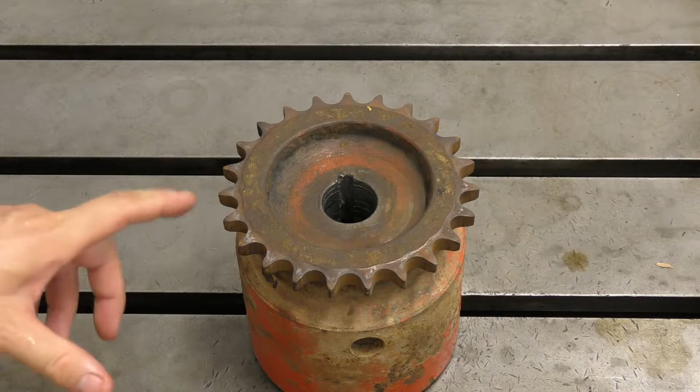Here's the next mission for the shed. This is a hub off a final drive on a Dingo, just like a small bobcat that you stand on the back of and ride around. There's heaps of different attachments for it.

This is the wheel end, so a shaft goes in here, and on this flange on the bottom is where the wheel bolts on. So the whole axle is actually the motor shaft, the hydraulic motor shaft. Pretty substantial looking shaft. This goes in here, keyed around like that.

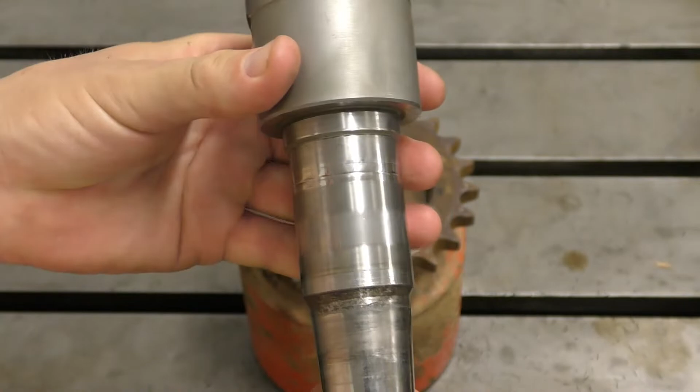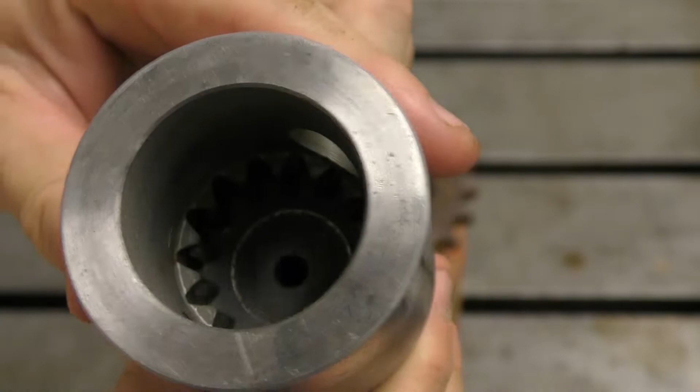There's big needle roller bearings in here, and spline up inside here. It's driven. So what's happened with this one, as you can see, the key's broken out. I've filed this, it seems a bit hard, and the way that internal spline looks, this nearly looks like a powder metallurgy part, potentially, that's been sintered and then ground.

These are all ground surfaces, another one here, another one here, here, here, here. Of course the taper, and then the thread's been machined.

I think maybe what's happened, I'm not 100% sure. So you know that in this here, the taper is a driving taper. If this was a nice matching fit taper, then there should be enough friction on that taper to never ever slip in here. So at some stage, either the nut's been too loose, or the key's been an interference fit and bottomed out and not actually let this thing seat properly maybe.

And it's allowed this to walk in there, and then the key's sheared. If I zoom in there, you'll be able to see the carnage inside that hole. You can see it's minced it pretty good.

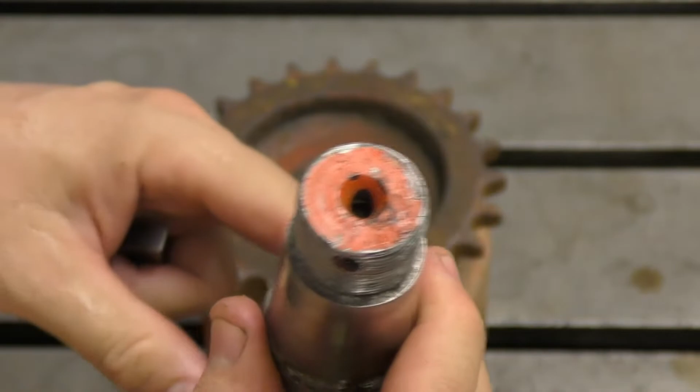So this is a 5/16 Woodruff key. I'll zoom back. Oopsie. 5/16 Woodruff key. You can see it fits the groove widthways really nicely. But the issue, I think, is that it was the wrong one. So see, it's never bottomed out. It doesn't sit in the woodruff.

So you can get different diameters of these, different arc. Potentially, you know, this was sitting, the previous key that was in there, I'd heard from the owner, had been ground down to fit the slot. Maybe that was still a little bit too high, I don't know, but either way, from forward, backward, forward, backward, forward, backward, which this thing drives the axle of like the little front end loader, like I was saying, it's eventually just broken the side out and smashed out of it pretty substantially.

So I have to get the right key so that it seats down properly, and then be very careful of the height to make sure it fits the keyway properly.

So the repair on this, what they've asked me to do is to build up this hole and then remachine it to this taper and then recut the keyway.

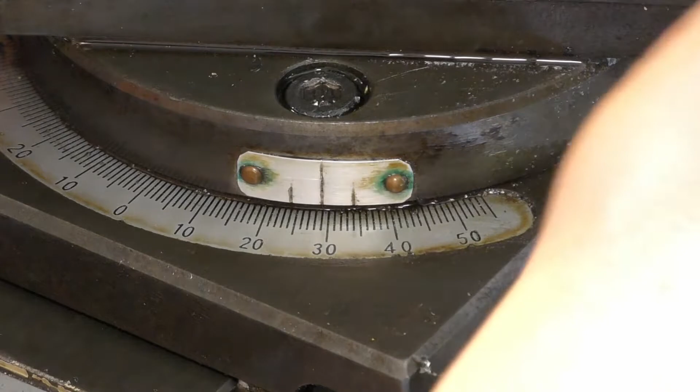So what I'll do is the 4-jaw's in the lathe at the moment, which I'll leave in there. What I'll do is I'll put a bit of steel in there, and I'll machine a point on that bit of steel, and that way that piece of steel is true to the axis of the lathe because it's been machined in the lathe.

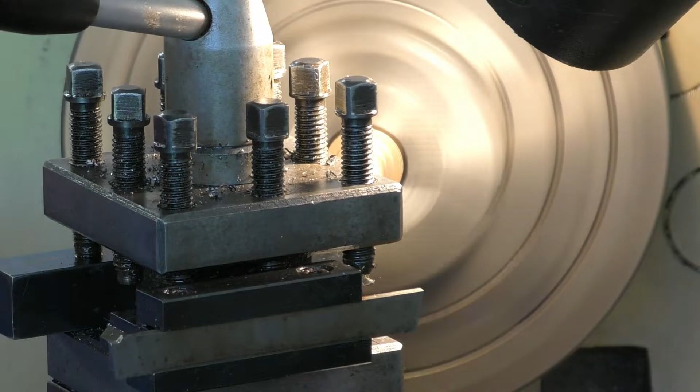That will then go in here into that point, and then in my tailstock, which I know is set on center, I'll put in a pipe center, and the pipe center, as you know, is just a big live center. It'll sit and pick up that radius there, and this should sit fairly true.

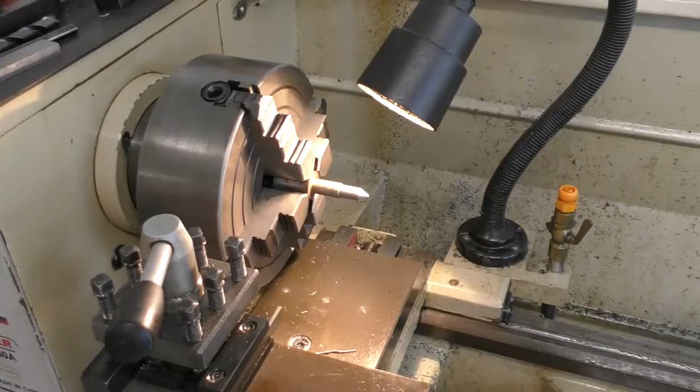Then confirm that, I'll dial this surface and just make sure it's parallel. And then what I'll do is I'll offset the compound slide on the lathe with the dial on the compound slide, and I will trace this taper.

Once I know that taper, I'll then put this hub in the four jaw and I'll machine out this bad material. Probably take the key away, or I don't know yet. I might just try and grind that out, don't know.

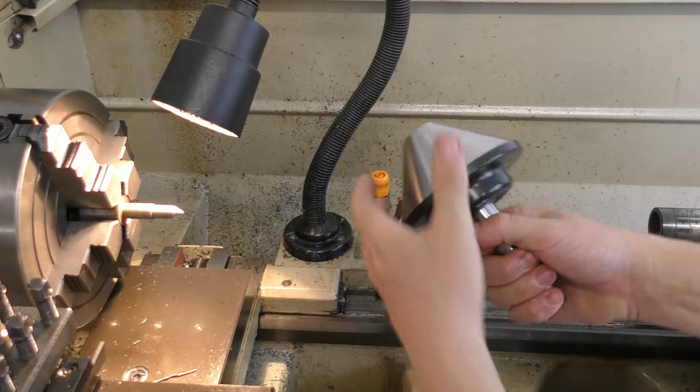I'll then fill this up with weld and then remachine the bore true to that taper. After that, we'll be cutting the keyway. Alright, let's get into it.

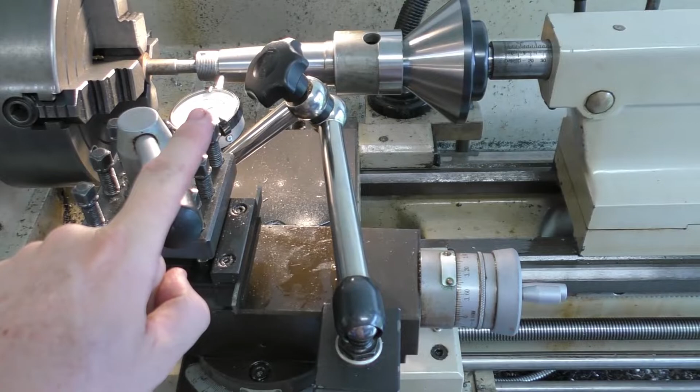So I need to turn it this way, try a little bit. And we'll clamp it again, and this time I'll also clamp the front one. Okay, we'll go back the other way. Looks like we got it bang on there. It's not moving off the 0. It's still bang on the 0.

So that's pretty good. And now what you should do is go to the other side and repeat that, just in case. So we've got this hole at the top now. Alright, let's go this way. Still on the 0.

Yeah, that's gonna be pretty close for me. Okay, so that's how you do the setup. So that's how we find out what the taper is.

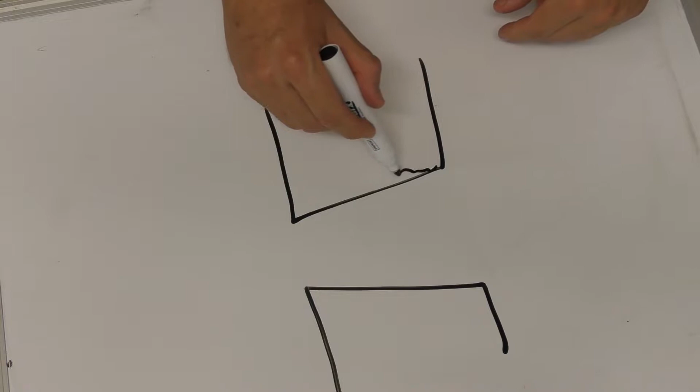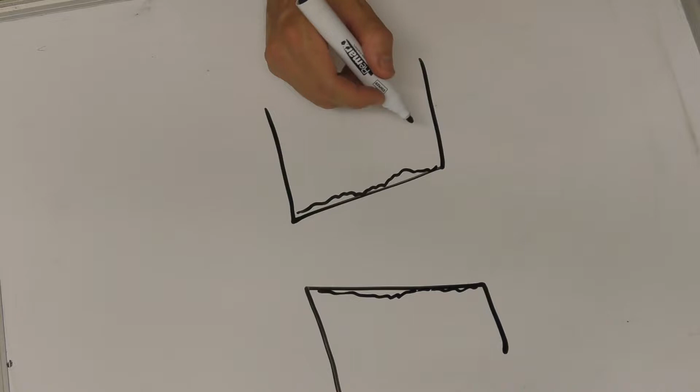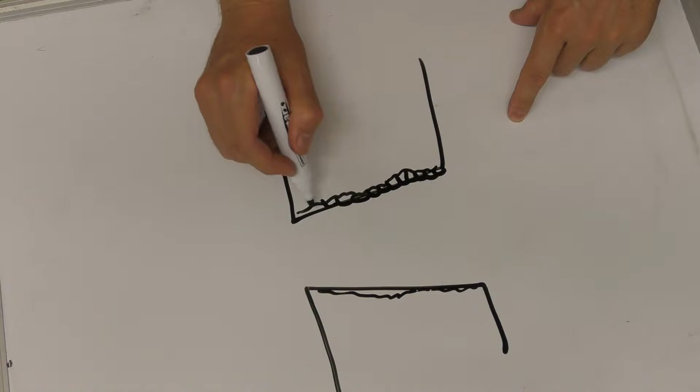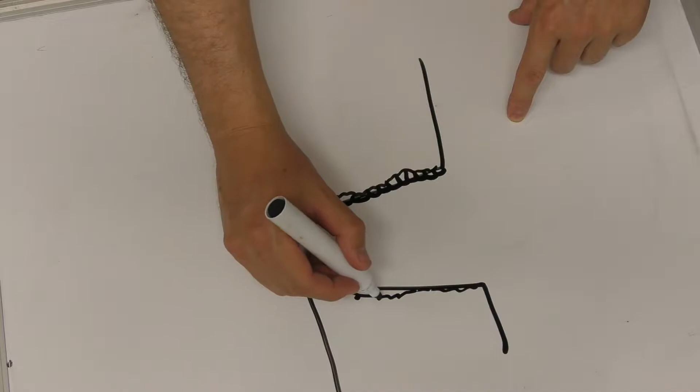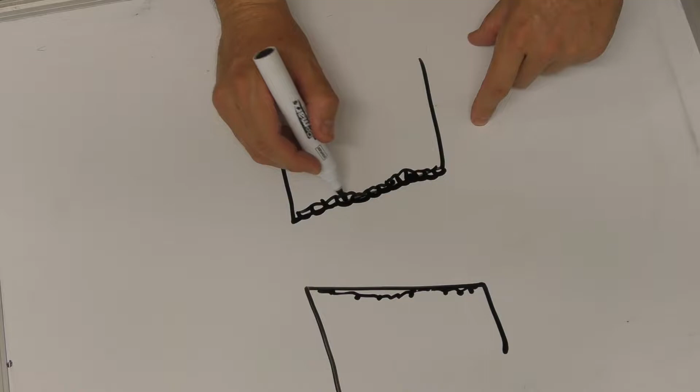So if we were to machine that bore out, that whole hub would translate up the shaft too much. So what we've got to do is skim material out of that bore, weld it up on fresh material, and then bore it back out to size, make sure the major diameter of that taper finishes up the same as the other one. And that's it. Alright, so all of this here was just for setup.

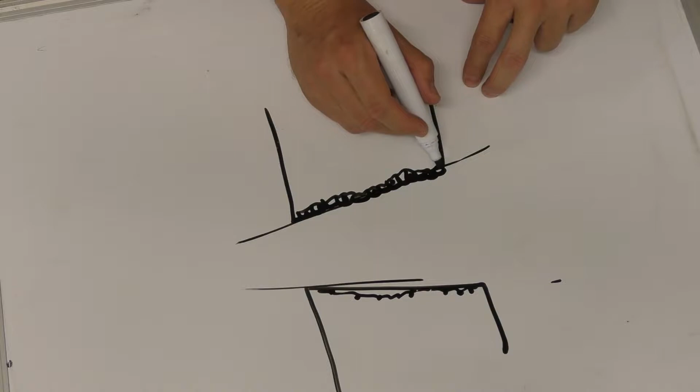I'm just going to explain why it's done like this, that you machine a hole out and then weld it back. Why not just weld it up and then machine it? Well, the reason is if you were to look at the hole that we've got here, we've got a tapered hole like this, and it's damaged.

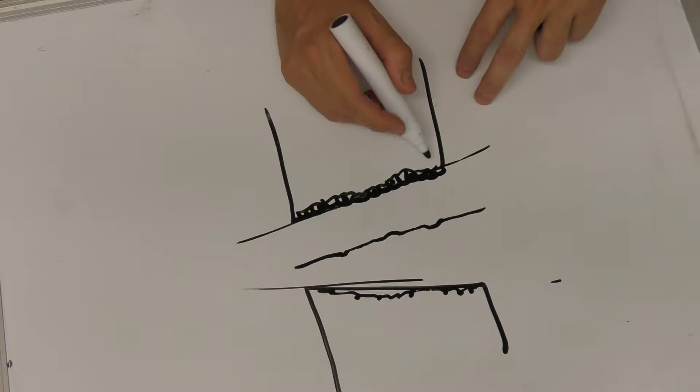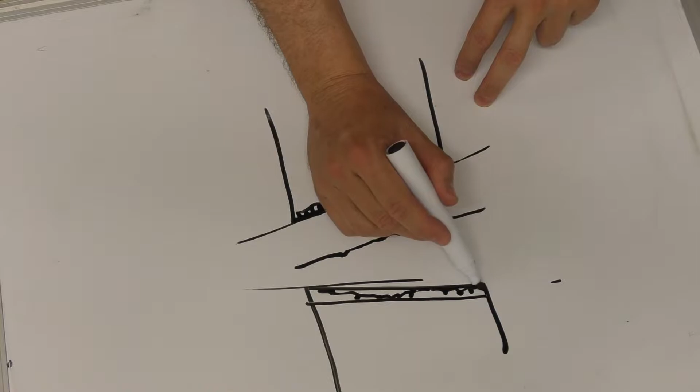You know, the hole's surface is like this all the way through. So we no longer have this nice machined taper anymore, this is the actual surface we got. So if you were to come along and place a weld over this, you'd follow that shape. And what you'd finish up with is any contaminants, whenever that shaft broke or the key broke or whatever happened, you quite often find contaminants get embedded into the surface of that damaged surface.

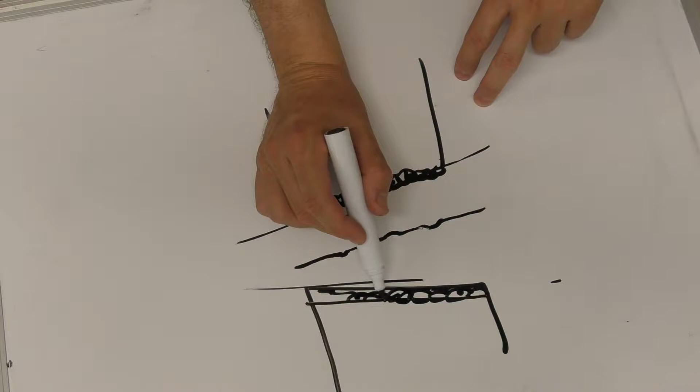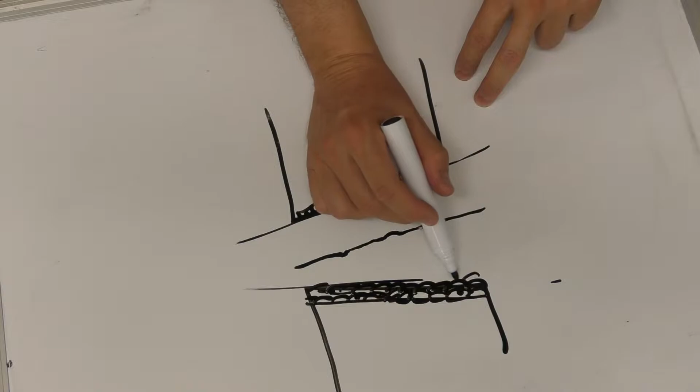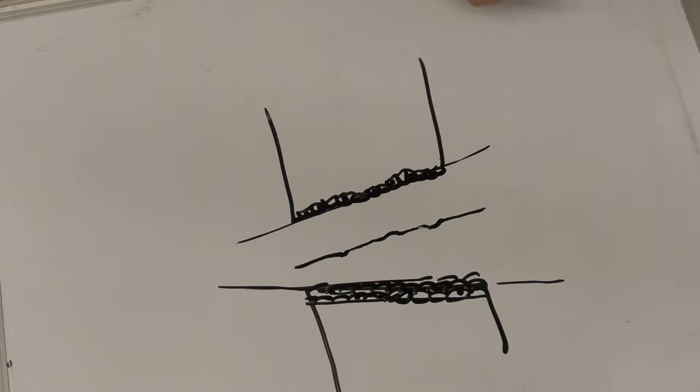You get all sorts of fretted material and whatever, who knows what's ever in there. When you weld over that, you finish up with, depending on the carbon content of the steel and the weld material you're using, hard spots all the way through, mixed into that weld pool as it goes. And when you come across later and try to machine this out with your machine to re-establish that surface, you quite often run into these hard spots.

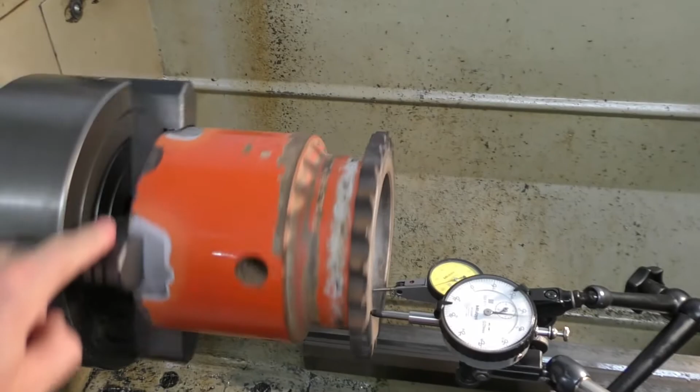And what will happen is, if you were to look at that surface a bit closer, let's just draw it in here: as you're machining along the nice homogeneous, uniform material, then you hit a hard spot, your tool will deflect and you'll finish up with a little bump. Wherever you hit a hard spot, or potentially even a soft spot, tool deflection, you'll get all these bumps and craters and you won't actually get a nice smooth straight path.

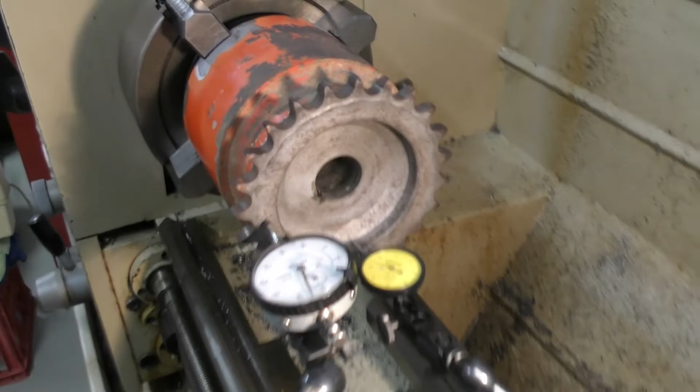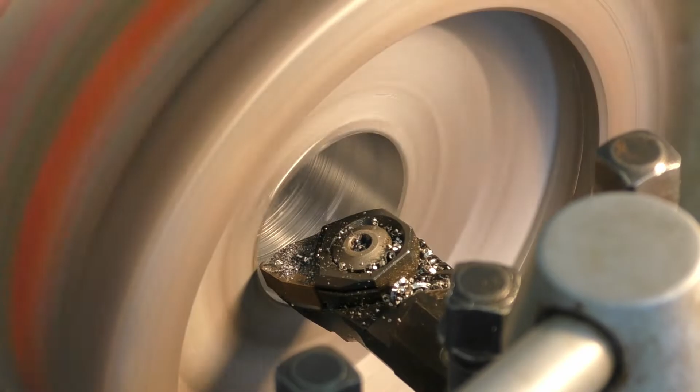So that's why, let's draw it on this side, you get all of this surface that's damaged and you just machine all that out, get rid of it, make the hole bigger. So then you've got a nice clean surface of parent metal and you start laying your weld beads on top of that. So any mixing that happens in the penetration zone of the weld is only between two different metals rather than three or four, whatever contaminants were there being removed, and you'll build all that up and keep laying beads on top and make it proud.

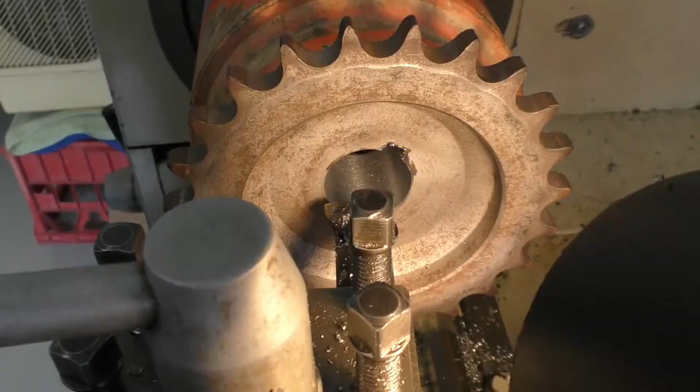The key is to put enough weld in there to get over the top of where you need to be, so that when you machine that surface, you're only machining the weld metal. And that pretty much sums up why you do it like that.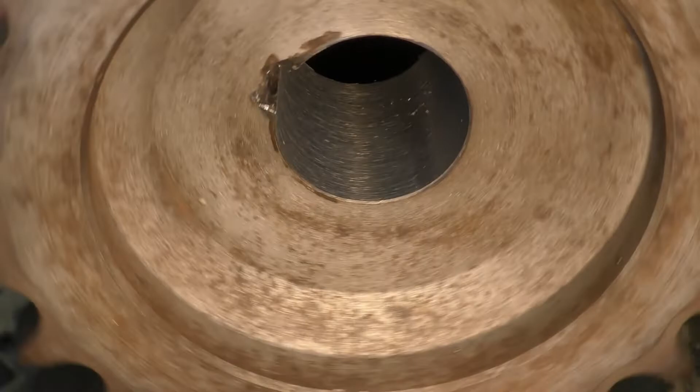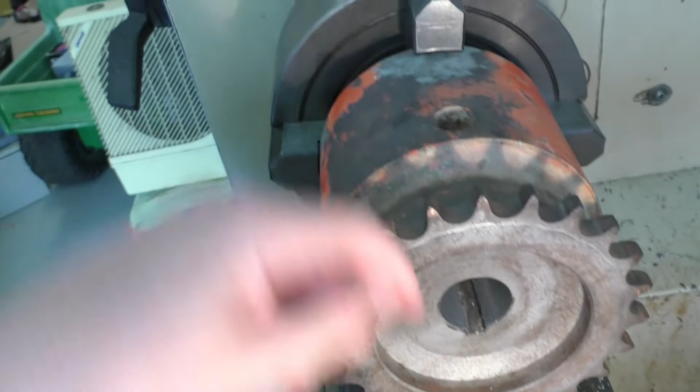Now it's raining outside again, but all I've done here now is got the hub. I've sandblasted where the jaws go to get a good grip, sandblasted the face as well just to clean it up a little bit. We've got two dials running here: just a normal dial running on the face, and then a finger dial running inside that register there, and just dialed it in roughly so I can skim out the guts of that hole.

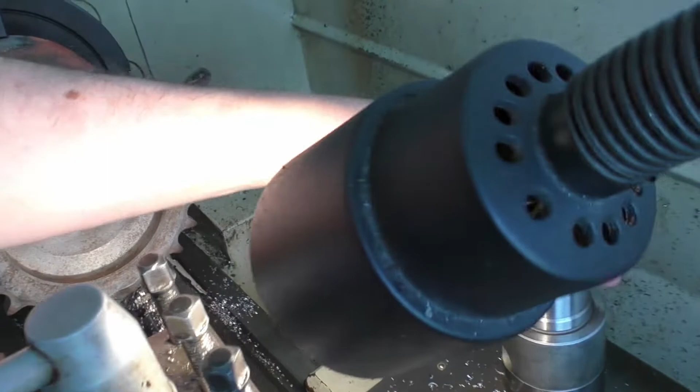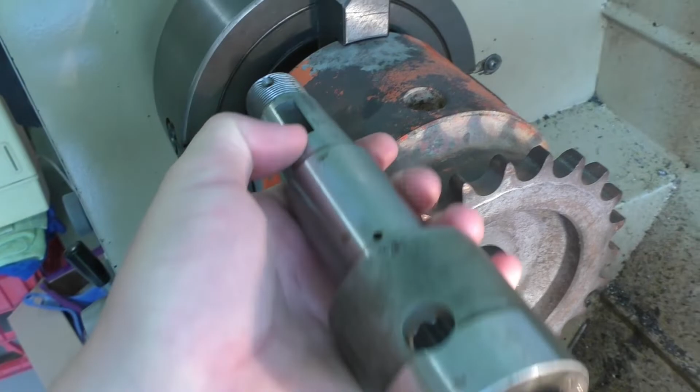I don't know if it's had a shot yet of the depth. As you can see there, it's pretty ordinary. So now I'll put a tool in the tool post. The compound slide's still set, so we'll skim all that crappy material out.

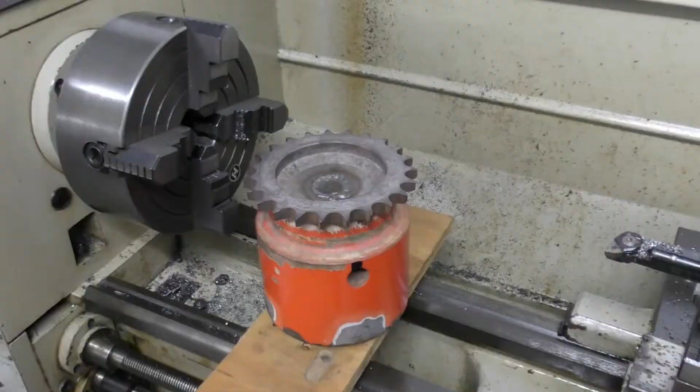You can see now we've cut the hole. Move this over a bit to take a look. Cut all the muck out of the way and clean the hole up.

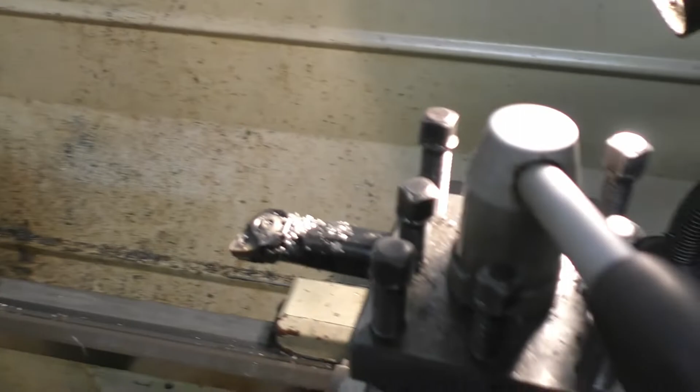The plan with the keyway is we'll fill this with weld and I'll cut the new keyway on the other side in this fresh material here. The reason this is located here is that it's in line with these holes. That's so that once the shaft's in the hole, the key orientates the shaft, and this hole here is a through hole that comes right through the other side, to allow you to get the split pin in through the end of the shaft.

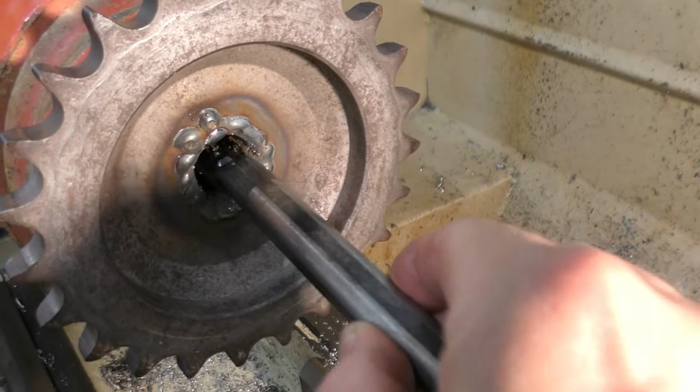So you can see the shaft, the key lines up with the split pin hole. It's got a castellated nut, so this goes inside, and once it's mounted, you'll see it lines up with that hole at the top.

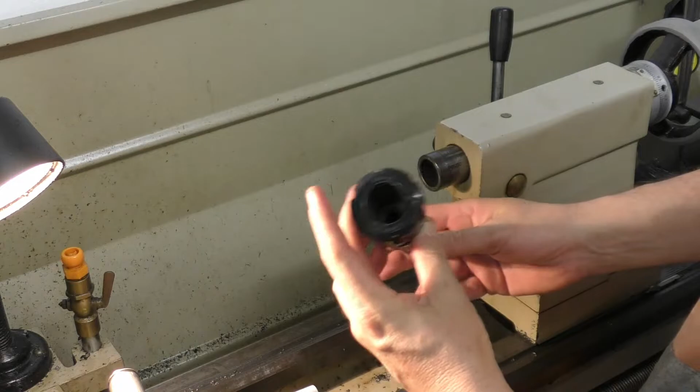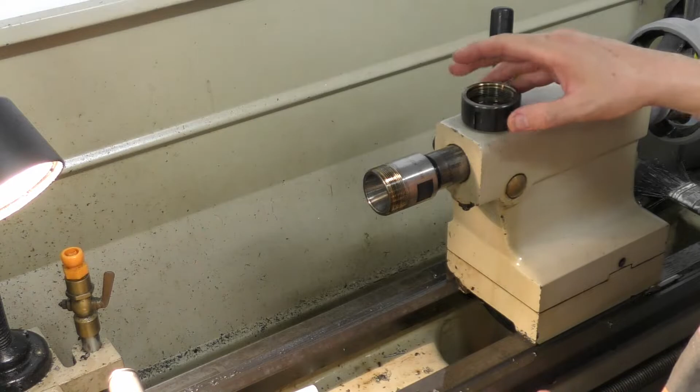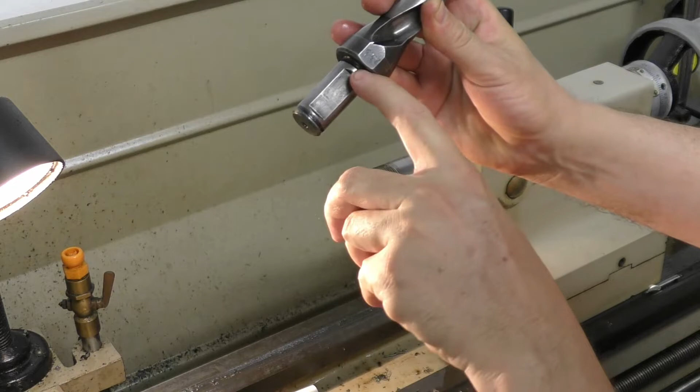So this key obviously needs to be in the right place. We won't put it here again because this is all damaged and yucky, and I'll fill that with weld. I'll probably get a little burr on and clear all that up, or maybe file the guts out of it and make sure it's nice and clean. We'll lay a couple of beads in there, then build this up over the top. Like I said, I'll mark this and make sure the new key and new keyway are in fresh material, not in this junk here.

We're back from the welding bench. I took the MIG, filled in the keyway, and then built up the bore all the way through to the back.

Now you can see I've got the job dialed in the four-jaw, back in the lathe. I dialed it on this face and this register, just like before. You can see I've closed that hole up quite a bit, which now won't allow the larger boring bar to fit in the hole. So I've got a selection of smaller bars, but even if I was to take a pass in here, it still won't make it all the way to the back. So that's not a good candidate.

I've got a smaller bar here, but same thing - if I took a pass in, it still obstructs at the back and doesn't make it right through. So the best thing to do is to drill it.

So here I have a 23.5mm U-drill, bought off eBay a long time ago, and I bought inserts for it to match it up. It had no inserts when I bought it, but I figured out the manufacturer's name that's on here somewhere - there, it's an ISCAR.

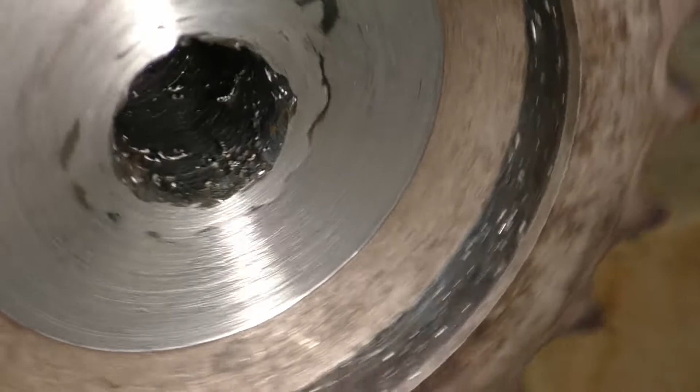There's an ER32 collet holder to Morse taper 3. It's in there - it's the right collet for the U-drill. Always make sure this flat here, that the collet always sits up on those two flats. I'll put the collet like that, and always make sure that collet's fully home.

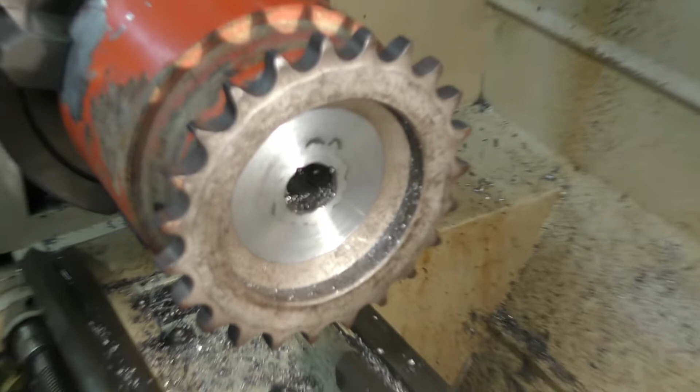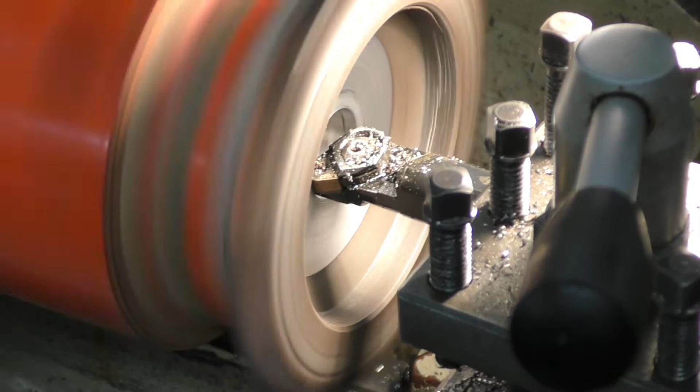Here's a really good example of what I was talking about before. I've just taken the face of that weld down, and you can see the hard spots in there. So that is weld metal, and that's the parent metal of the job. Something's happened where it's made that hard as hell, and the finish on it has come up different. Look at that - you can see the heat affected zones of the welds, and whatever's happened in that area has made it hard.

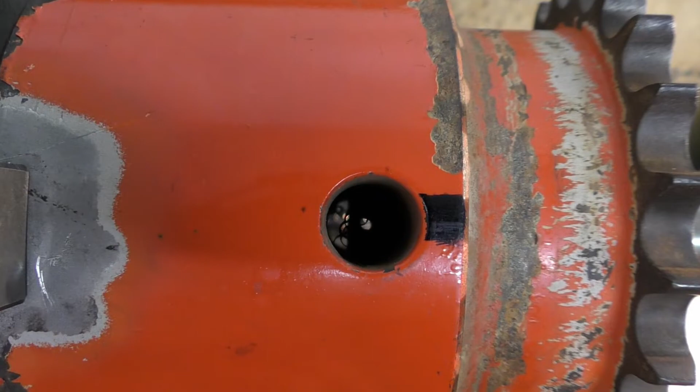So this bore I'll machine probably up to where my fingernail is, and it'll all be in this material here - none of it should be in that mixed section. That's probably just a good example of what I was talking about before. If you were trying to machine a really accurate surface in there, it's going to have ups and downs and ridges from this tool. You'll probably find, if I was to measure this with something really accurate which I don't have, that those spots there are actually higher because they're harder.

You just push the tool away from it. So you really don't want that in a bore, especially on a taper, because you want that shaft in full contact along that taper. So anyway, there you go.

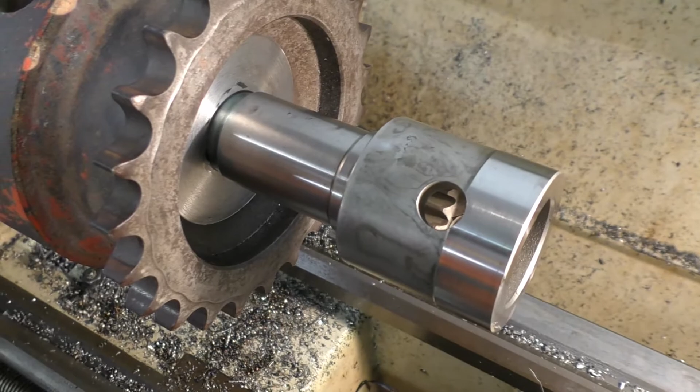So next thing, the U-drill's been in here and made that hole. I've just faced this, roughed that out, got rid of all the high welds, brought it back and blended into this corner here. Now I'll start machining the taper.

That's about it for the machining in there. Just test fit it again and blued it, and you can see down through the hole, you can see the end of the hole in the shaft that the split pin goes through. You'll also see here I put a Nikko pen mark to show where the old key was. So when the new key goes in, we'll put it around on the other side, line it up with the other hole. So basically that hole there, so we'll put the new key in this side lined up with that hole again, so you can get the split pin in the hole of the shaft.

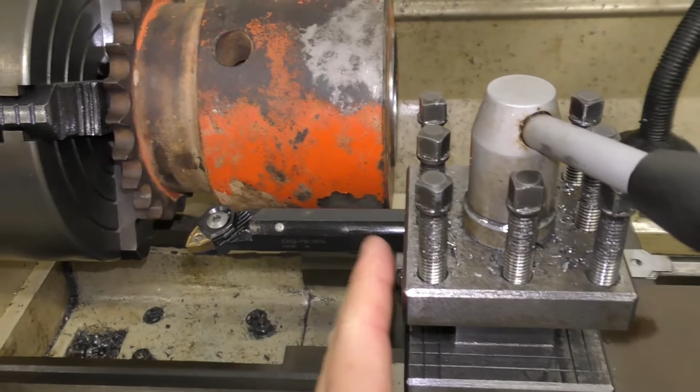When I originally looked at this, I've gone and faced this just to clean it up, just to blend that weld in, but before that, or you've probably seen in the earlier shots in the video, you actually see right out probably to near my fingernail there was like a discoloration, like there was a big washer or something maybe there. There's a taper here on the shaft, which I wouldn't imagine a washer would sit up against. I would have thought that would be like a square shoulder or something.

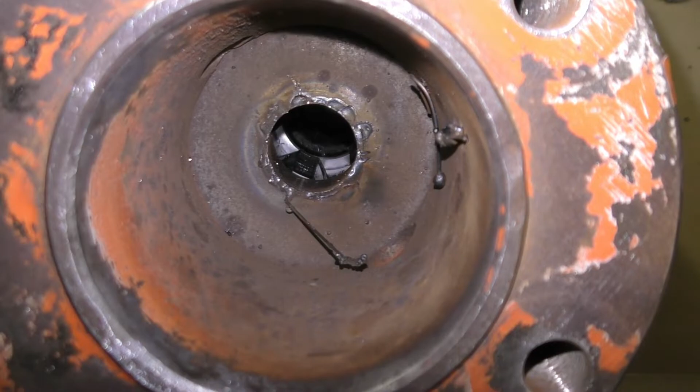There you go, out of the machine. A bit of a wipe with a dirty rag. See the bore's come up a nice finish. You see the heat affected zone of that weld. That was the keyway side. The new key will get bored in this side into the fresh material in line with this hole. The previous key was there, as you can see.

It's amazing how differently the tool skips across it, but the bore come up nice. A couple of little porosity holes, like you can see one there, where either the shielding gas from the MIG didn't get in there properly or whatever happened, but you can see the bore all smicko. Finish come up nice and smooth, and the shaft fits.

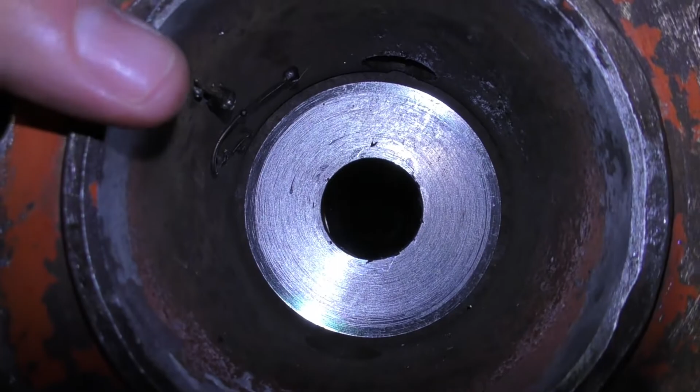I'll flip this around now in the four-jaw. We're grabbing it on the inside of that register that we dialed up off before. So I flip the jaws around and we're pulling outwards. Stuck the boring bar out just enough to reach the bottom of the hole before it hits the tool post. And what we're going to do is go inside now. I've dialed this face and also the run out. I gave it a little touch in there as well with a little finger dial just to make sure that everything was nice and straight.

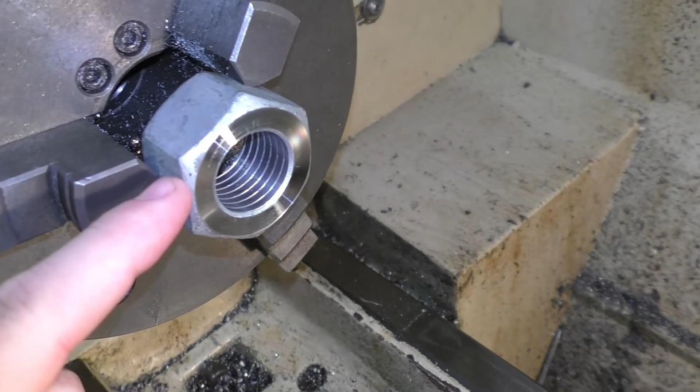What we're going to do now that this is set up in the lathe and it's running true, we go in there and face. You can see where the weld is proud, because I welded it all from the other side, stuck the wire right out. You can see a couple of dags here where the wire's touched the side. But basically, I was flat out getting the torch right in from the other side, so I had to have a lot of wire sticking out.

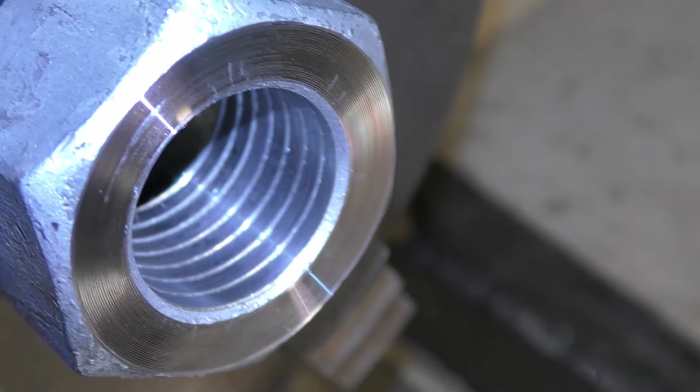So I tend to let the wire run out so that the area is flooded with shielding gas, and then bring the wire down onto the job so that you've got a good shield, and then whatever wire pokes through, well, it doesn't really matter, you knock that off later.

So what we're going to do now is just pass my finger there. I can't reach right inside, but that surface there, we've got to get rid of that proud surface because the shaft comes through this hole, and then there's a big washer that goes against that face and pulls the shaft into that taper. Alright, so we'll do that. I'll probably do that off camera because it's going to be a mongrel trying to set this up to get a camera shot in there while we're doing it. So I'll show you once it's finished.

And here's what it looks like. So I've still got to knock them dags off there from the welder. You can see a couple of heat affected areas there from the weld that are hard. I've got to clean it up yet. I've run a deburring tool in there already, it's like your Noga deburring tool. Run that around inside the hole, clean the edge up, tried to chamfer it from the inside as best as I could with the tool.

But that's pretty much it for that job. So I'll knock these dags out just in here, that one and the other one. And that's it. Ready for the keyway to go in.

This is what we're up to with making the new castellated nut. You can see that nut that I had before. I faced it and bored the guts of it out to the minor diameter of the new thread, which is this one, inch by 20 threads per inch. You can see even though it's to size now, there's still some of the old existing thread in there. It's trying to focus on the wrong spot.

Just as a little bit more info, this thread here is actually a standard thread. So you can get a thread called UNC, which is Unified Coarse. There's UNF, which is the fine version, and then there's a UNEF, which is Unified Extra Fine, and that's what this is. So this is a standard thread out of a UNEF thread table. So if you look that up, you'll see 1 inch by 20 threads per inch, and that's what this is. Okay.

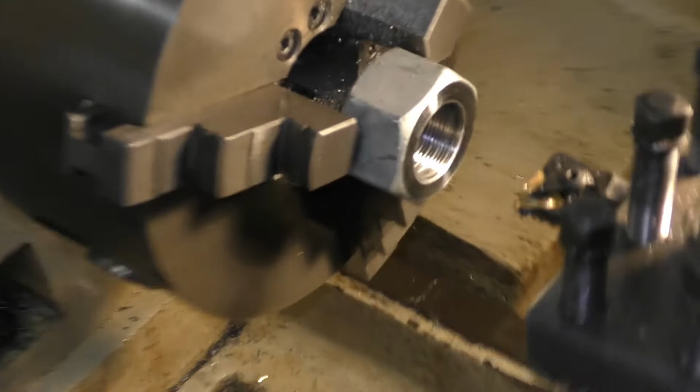So I've taken this thread to size now. All I'm doing is just a couple of spring passes just to give you the idea. Because it's a through hole, you can go pretty fast. So the spindle's spinning at 1,255 revs a minute. This is the final size diameter. So all I do is take the cut. This lathe's got a foot brake so I can stop the spindle, and then I back off a clearance amount, back, reset the cut, take it, and this is what it looks like.

Back a safe distance, and stop again, and back to the spring pass, and stop, and back to the spring pass depth, final size, stop, screw it back in a safe distance, backwards, and over and over and over. So that's how I've cut. Gives you a bit of an idea, that's how I've cut the thread the whole way down.

So sometimes what you would do is set the tool up at an angle, just like what you would on an external thread. You'd be following the V of the thread down like that, but in this case I'm just plunging straight in and taking lots and lots of light cuts, but in the bore of that hole, obviously. And that's about it. I'll just unclip the camera and you can have a look inside the thread. Whoopsie. All nice and smicky dicky all the way through.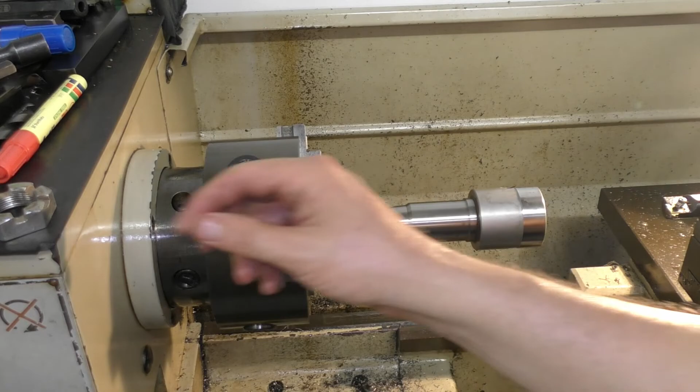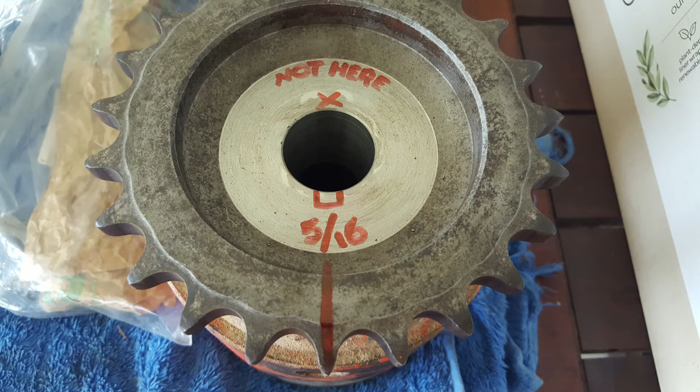And while we're going, we'll just screw this out of the way. And try the bolt. Well, the start's not the best. It's a nice fit, that. Yeah, nice. That is nice and firm, that. It's good. Nice fit.

And that's it. Now what I've got to do is, I may try and just mark this in the lathe now while it's true to this face. Mark it and give me some guides so I can cut this nut in half. I'd like to be able to get 2 nuts out of it. But I haven't actually measured the nut properly yet. It's going to go that way obviously because I've faced this true to the axis.

It doesn't really look like I'm going to get 2 out of it. I might. They might be a bit scungy though. It'd be nice to get 2. It'd have to be an extremely thin cut, like a 1mm cut-off disc or a nice thin hacksaw blade, and just cut it all by hand and then face off any wigglies that I make in error with the hacksaw. So we'll see. I'll have to have a think about that. I might just make one good one and see what's left over.